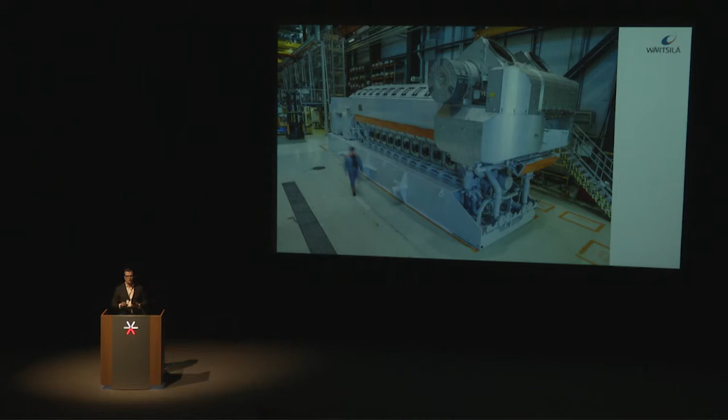But it's still a tiny part of the whole system we want to build. So we have engines there, but there are a couple of other things also—for example, navigation, propulsion, pumps and valves, things like this. It's a very complete offering, and as it's said, it's like the most complete offering in the world.

And this provides us a better view to actually provide better value for the customer, because we have an integrated system instead of just providing one subsystem and making it good. We make the whole system good, and find the synergies.

A couple of words about additive manufacturing, which is also called 3D printing. It's a manufacturing method based on a layer-by-layer principle. Based on the 3D model, we build up really thin cross-sections of a geometry and eventually come up with a ready-made part in one shot.

We are starting from scratch. It is a toolless technology, which means we are not transferring any geometry to the workpiece, but instead we grow it. That means we don't have the conventional limitations related to, for example, casting, cores, molds, and also machining, because with those you have a tool with some kind of geometry—you're just inserting that geometry into the workpiece and subtracting material, whereas we are adding material here.

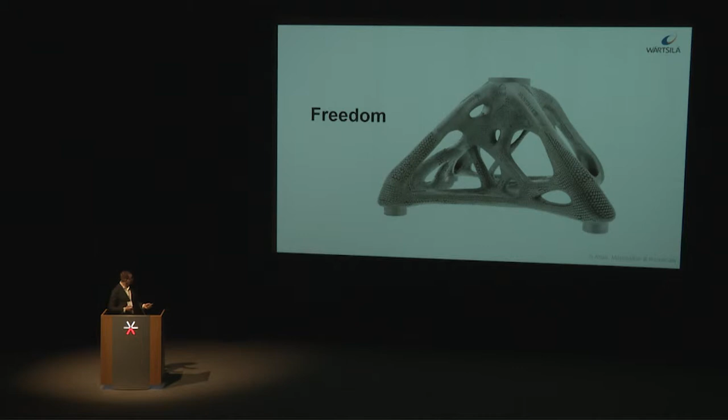Why is digital exponential? John said that, yeah, in hardware, it's actually not, but I'm talking more about the applications, and they are. Since it speeds up communication, it shortens the cycle time. For example, iterations needed in simulations. We can do multiple instead of one, so that we end up with better answers. Also, it will increase the available data and also the quality of data, because it enables us to analyze the data in a way that has never before been possible.

And also, the importance of open source, this kind of copy and paste solutions. They can be considered as Lego bricks. You just put them next to one another, and then you have a ready-made solution, tailored only for you.

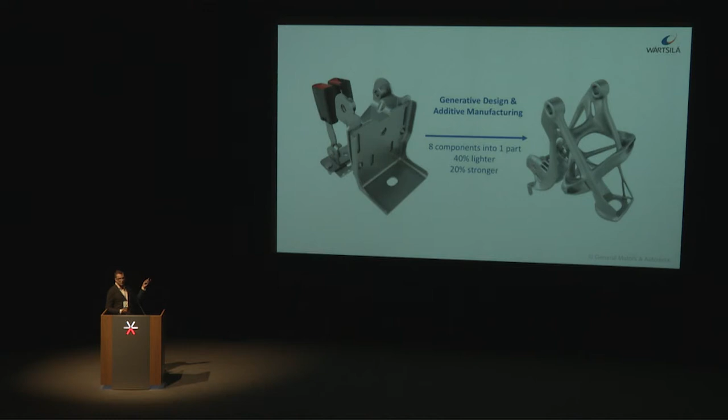It's only based on the input data, only based on the functionality of that particular part, of those particular forces and stresses it has to withstand. So it's not this kind of general trade-off between manufacturability and functionality. It's almost perfect. And as you can see, it's quite much better also than the original part.

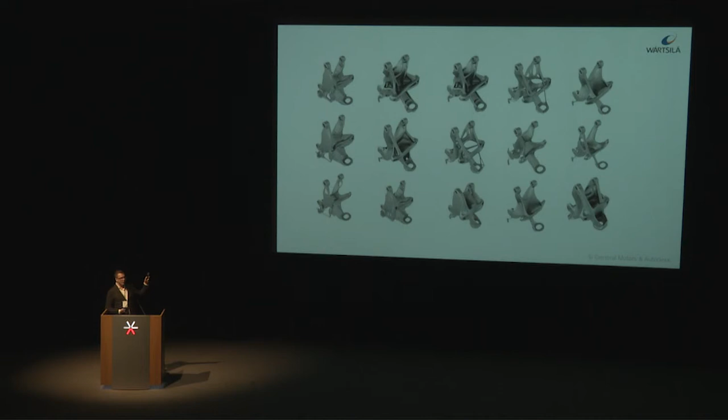Also, what if we want to make some changes to the design? Not a problem. These were all based on the same model. And by altering the input data, for example, forces, we can put it in a tank instead of a Nissan Micra. It's definitely a different part, but it has the same functionality. It has been tuned for that particular situation.

It's called mass customization. And as I said, by additive manufacturing, you can actually build this with the same price, every single piece. It doesn't matter how many different versions you create.

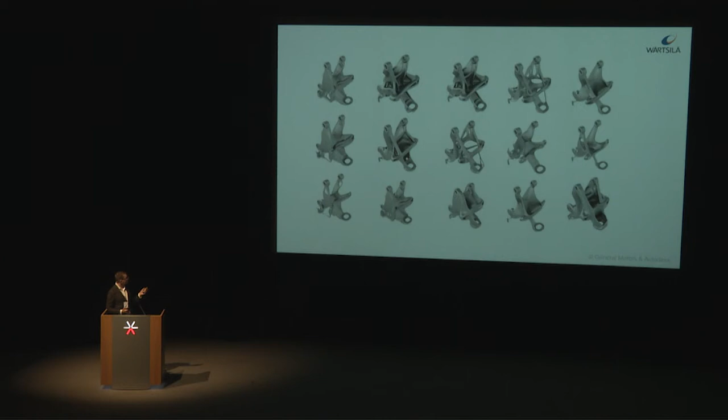Okay, it was really high level things, really flying high stuff, and it's easy to get distracted by all the fancy tools and all the fancy terms. We call them buzzwords. So any ape can reach for a banana, but only a human can reach for the stars. And in the context of additive manufacturing and design for additive manufacturing, the buzzwords are the banana. You just think that, okay, by taking this banana, I will be a world-class player. But it's not like that.

And that's what we call the smart approach. It's understanding the purpose, understanding the functionality, and it's not dependent on the tools. It's not about the tools. It's not about the technology. It's about the purpose. We want to do that, and we want to make it the best way it can be done. Also saying that, yeah, 3D printing, it's not for us. Maybe you don't understand it well enough. You can't say it like that. I will show you why.

Yeah, also this example here. Big thinking, more than top technology. For me, it's the same thing as buying the most expensive sound system there is on the market. And then you decide that, okay, I want to put it to the test. I want to hear how it sounds to play a song through that system. And then you choose a David Hasselhoff song. And what do you think comes out? It's still David Hasselhoff. So it's not about the technology, it's only an amplifier. You have to rely on that original idea.

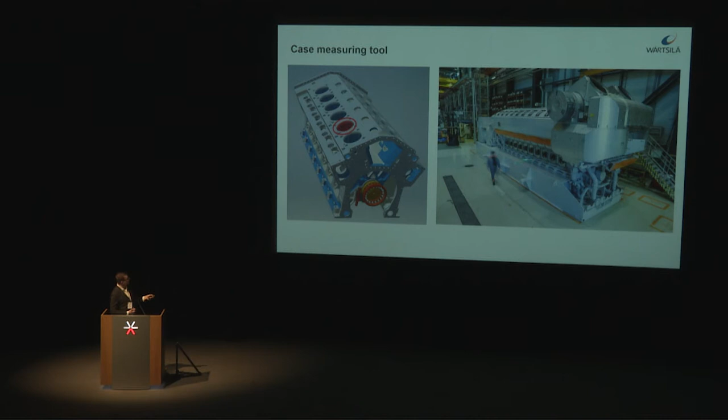Yeah, we had a problem. We wanted to measure the quality of the machining in that huge engine block. The perpendicularity between this face and this surface. It's a relatively simple task to do. And again, you see the scale. This is actually even the smaller version of that same problem. In this case, this hole diameter is 46 centimeters, something around this. It's huge. Can you use additive manufacturing? Is it too small? No, it's not too small.

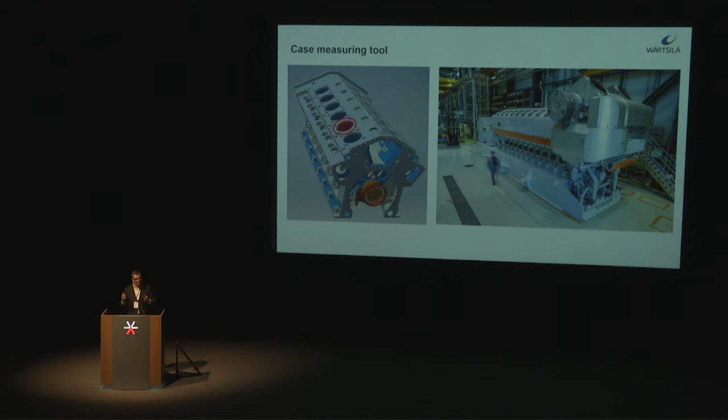The conventional way of solving this problem was this. It's made of machined aluminum. It has been welded. There is much of really, really accurate machining to be done to achieve this product. There have been some welded steel structures also, and still the function is to hold the dial gauge, the clock, here, and to measure the perpendicularity of this surface to what is here.

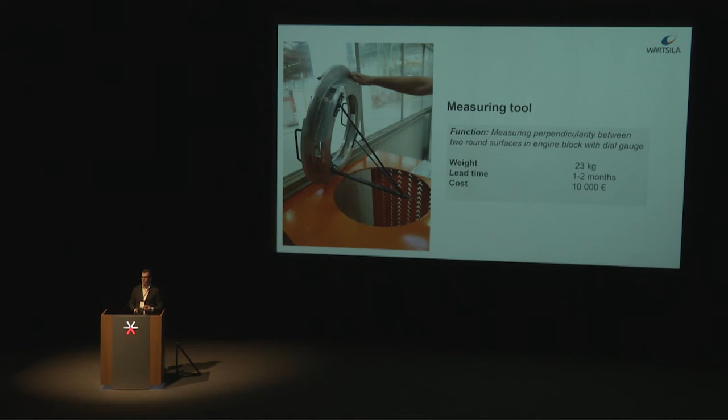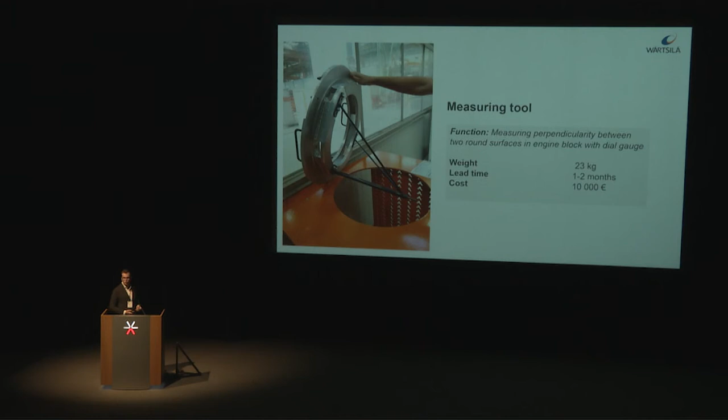It was 10,000 euros. For decades, it has been the same. We have multiple of these same designs. It's really, really expensive. Also, it's really slow to manufacture, a couple of months, and it's clumsy. It's really clumsy. 23 kilograms. We need a crane to lift that from cylinder to cylinder. It doesn't work. But instead, using a smart approach, we came up with this solution.

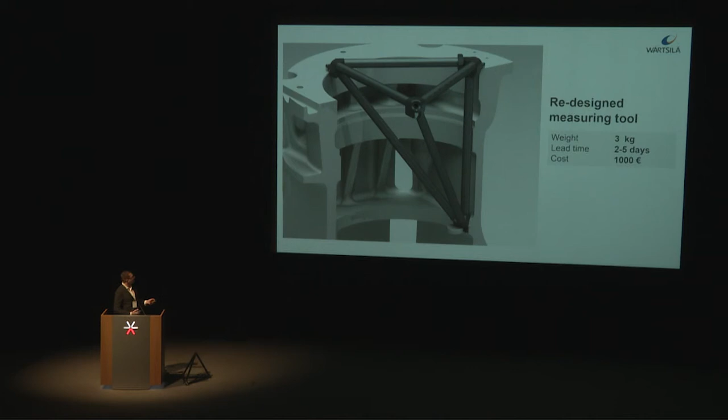This has the exact same functionality as the conventional one, but as you can see, we have dropped 20 kilograms of mass. And also 90%, 9,000 euros of manufacturing costs. And still, we have the dial gauge here. It has been connected to the laptop, so we can utilize the data after it. It's already digital. It's good. And the weight is around 3 kilograms. As you can see, I'm not that strong. I can lift it.

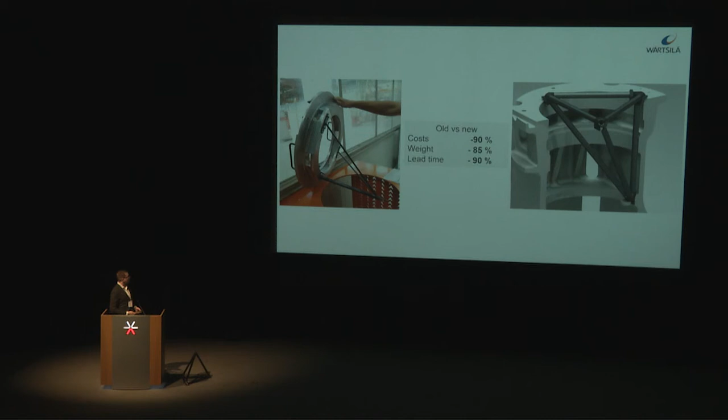So, in comparison, things using additive manufacturing and utilizing the freedom in a smart way can get disruptive. You don't see very often these kinds of figures. You see maybe 5%. It's still quite much, but 90%. Can you believe it? And it's really working. It's not a problem, because we only choose to 3D print these joints here to mass customize them. And then we use standard carbon fiber tube, standard bolts and nuts, standard parts, as many as possible, and still we can achieve a goal like this.